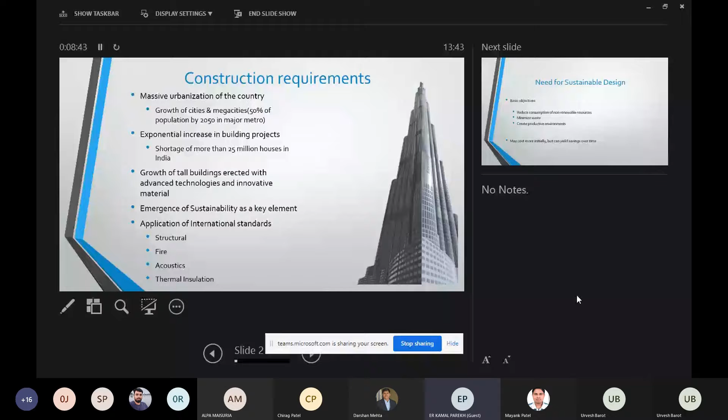It also gives thermal insulation. For areas managed with HVAC air conditioning systems, there is thermal insulation also with these drywalls. It's a sustainable design. It reduces consumption of non-renewable resources, it minimizes waste, and creates a productive environment. Its initial cost is higher, but it can yield savings over time.

There is also an environmental impact that we have studied regarding why we are applying this drywall. The traditional construction system consumes around 70% of fresh water, 25% of wood timber, 33% of CO2 emissions, 30 to 40% of energy used, and above all, 40 to 50% of raw materials is explored. Under these circumstances, we decided to go with these drywall materials.

Now I would like to share some photographs, because we have executed this, so we know how to execute and how to manage it. The real-time photographs are there. For the stem cell building, if I present, sir.

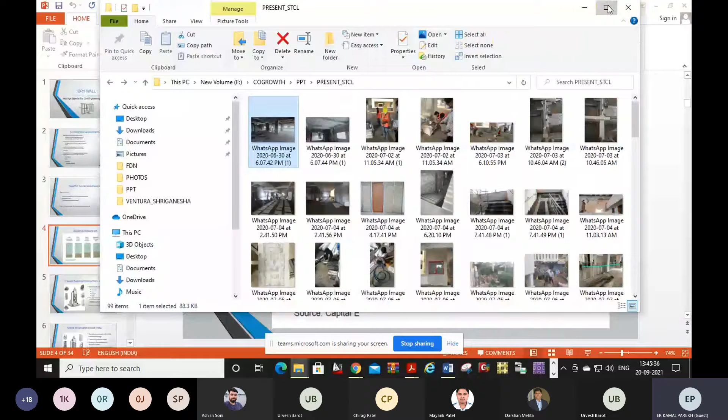Yes, this is the core cell structure I was talking about. It's an RCC column and a beam, with a slab, but we don't have any flooring over there, and we don't have any separation wall over there. These are the periphery walls available to us.

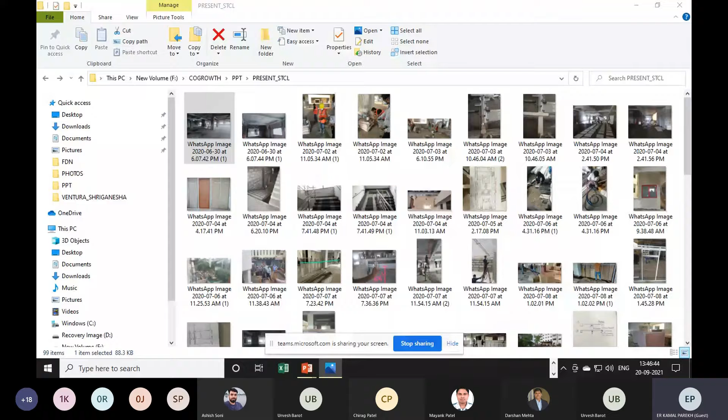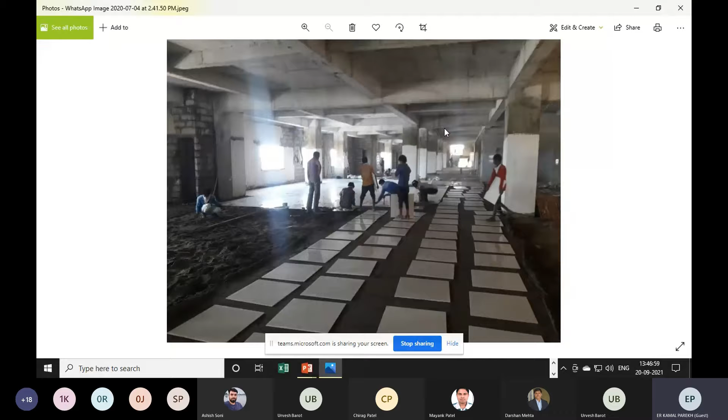So we have used this aerated block also, which is a new age material, because for the toilet blocks and others there are concealed lines. To manage concealing the drainage and plumbing lines, we have used these aerated blocks. These plumbing lines and others are executed during the progress and process of the work. These are the floors on which we have used our traditional vitrified tiles for execution. For the finishes and others, we have used gypsum plasters.

Yes, this is drywall. What we saw there are the vertical members fixed at the bottom on the floor and fixed at the top, with a secondary member, because the size of the sheet available is 8 feet by 4 feet. So to manage the fixity, we require this kind of fixing. We can also fix the door there, and we have fixed it.

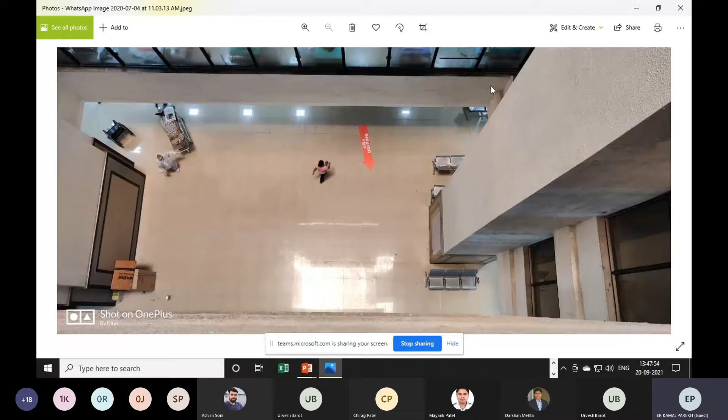After doing all this, we prepared a finished floor for the hospital block. This is the waiting area, a large waiting area of around 15 to 17,000 square feet at the bottom on the ground floor. You see the way and manner in which we have worked. This was the system adopted: one single drawing, one floor having 110 bed capacity on the 7th, 8th, 9th and 10th floors. These plans were prepared, and on each drawing, for each issue and resolution, there is a markup which is signed by all authorities and then executed.

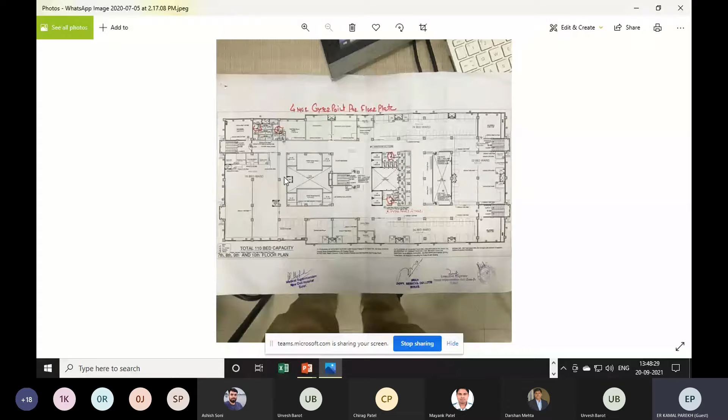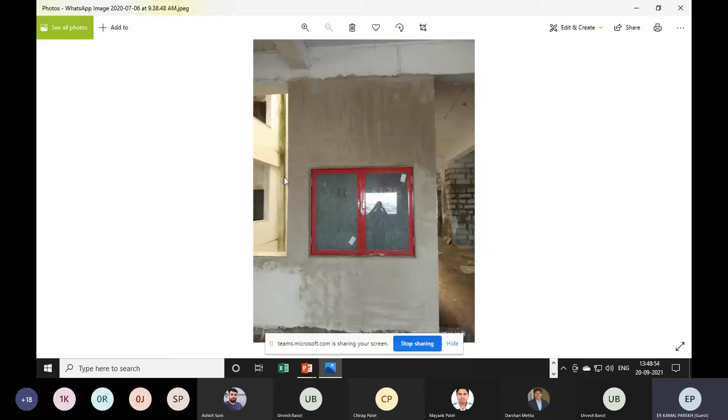For the electricals also, we have managed with GI hot dip galvanized GI sheets and others. For fire protection in hospitals, fire resistance is an issue, and to take care of that, we have a fire duct which is also managed with the drywalls as well as aerated blocks. This is the row side on which we have executed. This is a photograph of one oxygen tank installed there. I'm lucky enough to have 3 oxygen tanks of 13,000 liter capacity for the civil hospital campus, with one campus having 3 tanks together, to take care of COVID patients.

This is the row framing, the row framing of the panels. On this panel, calcium boards are fixed on both sides, and then there are plaster boards which are also fixed. Now the issue that arises for us is how to manage the oxygen lines, the electricals, and the nurse calling system, because if any patient requires help from a medical authority, on-floor doctor, or nurse, they need to call them. So to enable this call, it requires a nursing calling system. All these systems are also managed here within these drywalls.

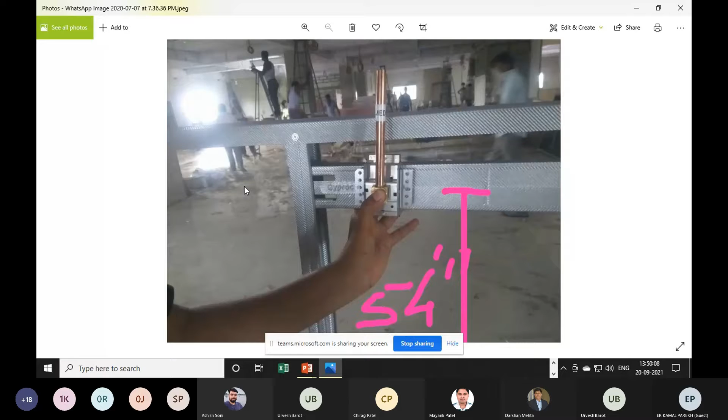Look, these are the medical gas pipelines, because each and every bed requires oxygen, which is high pressurized oxygen supply to each and every individual bed. On each floor, number of activities are going on - the flooring, the plastering, the finishing, the whitewashing, medical gas pipeline laying, electricals, all the things are going simultaneously.

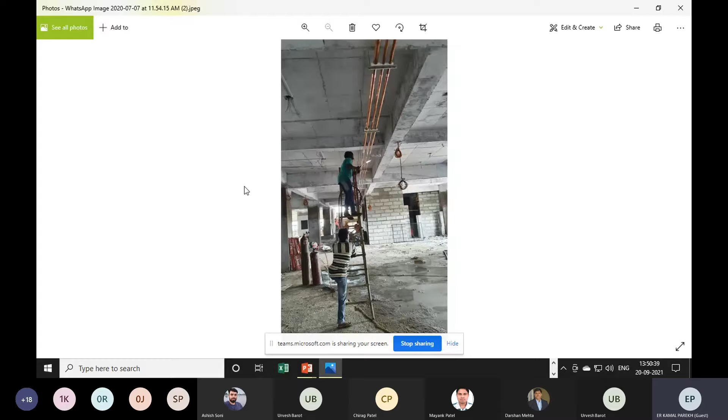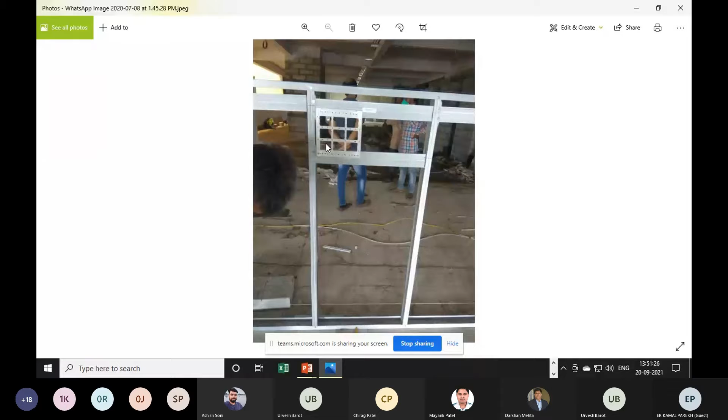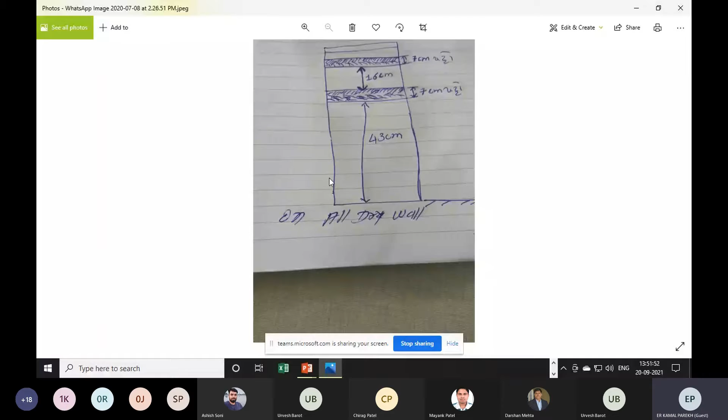Because for the operation of fan, light, tube lights and all other, it requires electrical line out and layout, and all is managed within this. And you see, these are the way how we manage it. On site, this kind of sketches were prepared, released to the executing agency, and they are executing it, and because of that, this 1800 bed facility is available for Surat.

So this is also one photograph, because we have worked. These are the real photographs. Nothing is added over here. Nothing animated over here. These are all the raw photographs taken over there while visiting the site, while walking there, and while supervising it.

And you see, this panel is fixed from ground to the bottom of this beam, so it's a complete cladding over here. So these are the ward, this is the ward area. So with the medical authority, we have observed that we require only 5 feet or 6 feet of height of separation is enough, because then we have visibility. If any doctor or medical authority is passing through, they can have a vision inside the ward also, so he can take care of it, right?

These are the oxygen points, oxygen outlets, fixed with each bed, and they are positioned and fixed with this drywall panels itself over here. So with this drywall, you can manage each and everything we conventionally required with our conventional system of brick masonry or aerated block masonry and all others.

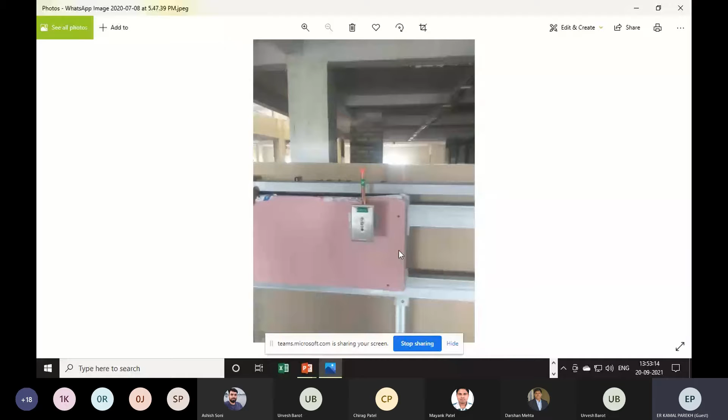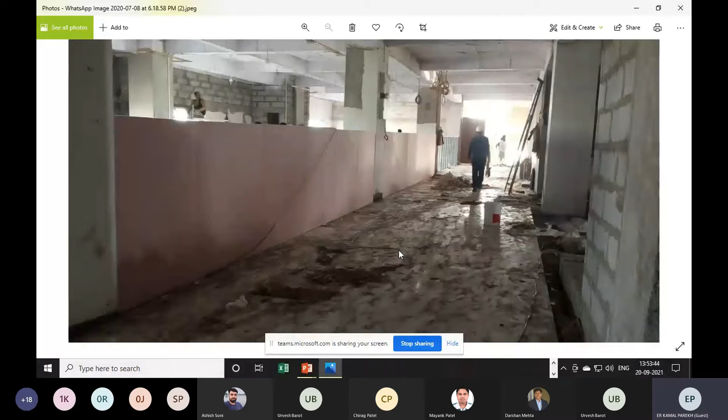So this is another photograph of a complete panel ready, and these are just the rough finishes you are observing. Over it, we have applied simple waterproof putty, and then for the sterilization point of view, sanitization point of view, antibacterial paint, nothing else. And our ward is ready to serve.

You see, if you observe that the length of the span is around 8 meters, and for that 8 meters also, it straight away works. We have checked the lateral stability also, because basically I am a structural designer, so I was worried about the lateral stability. Longitudinal direction it is okay, but what about the other direction? In the lateral direction, we have checked it, and if required, we have suggested some solutions and suggestions like this.

Just as we structural engineers understand what a vertical band is - okay, so these are the vertical elements. If the length is around 8 meters, at center, this 150mm to 200mm width, right? These are the things we have provided, which provided lateral stability. If it's column to column connected, but if it is column to free end, then at the end also we have suggested similar kind of vertical bands which are made of that framing GI element.

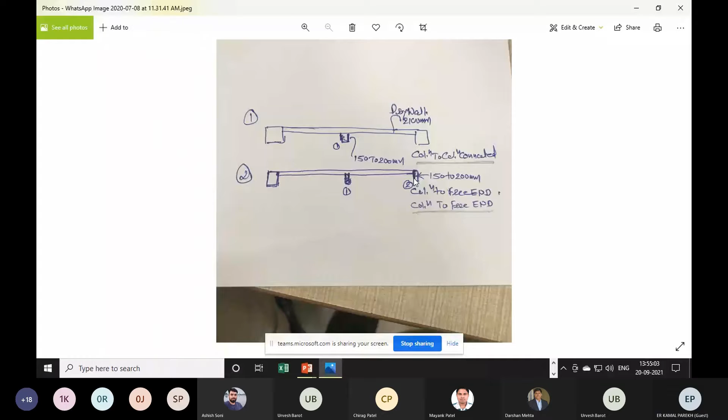Look this, this is free end, this is entrance to the ward. So we have provided over here in both directions, so lateral stability is achieved. Over here with column, it is fixed; on floor, it is fixed with the flooring. And vertical tile members are also there, but this gives the lateral stability to the elements.

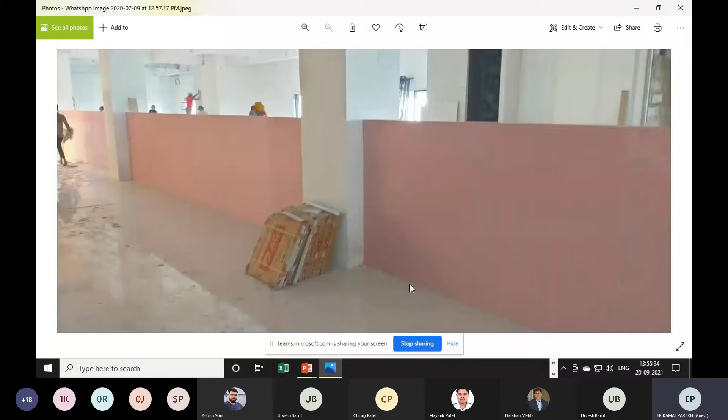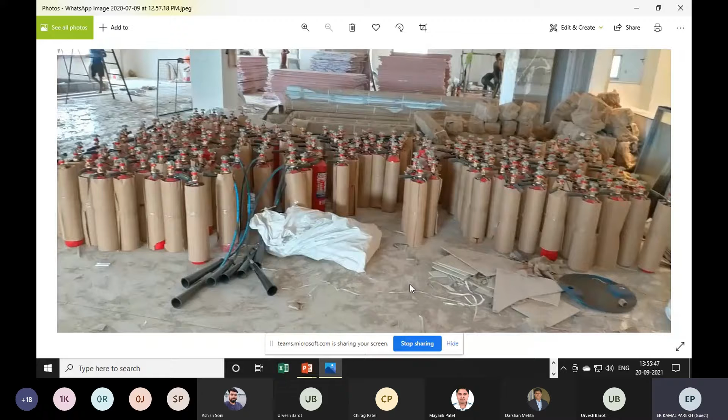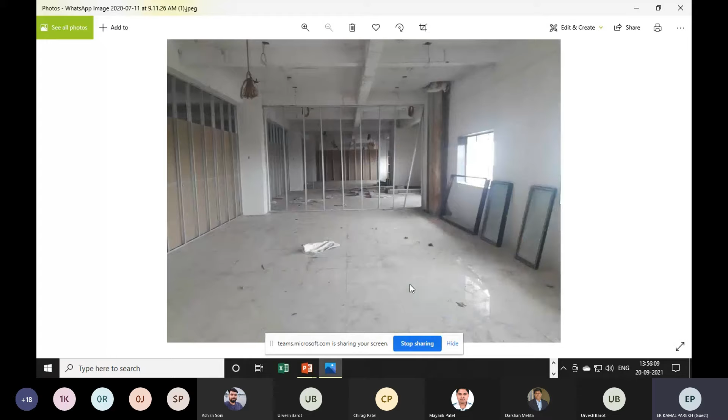These are the finishes we have achieved, and you see, with it, these are the fire hydrant - everything is there on site. I'm telling you, as we are working now, a lot of things are going on together. The fire hydrants are there, and then these furnitures are also fixed over there. This is also oxygen outlet. The furnitures are also laid because we have procured that material, but how to stock it? So we have procured it, we have stocked it on the existing floor itself, where work is going on, and it continues.

This is the stem cell building, which is basement, ground plus 10-story building. And this is also the tower crane we have used, because on terrace, for the fire requirement, we require around 240,000 liters of overhead tank. And to construct with the traditional RCC, it is difficult for us. So we have procured 10,000, 20,000 liters capacity PVC tanks, and we have just put it on the terrace.

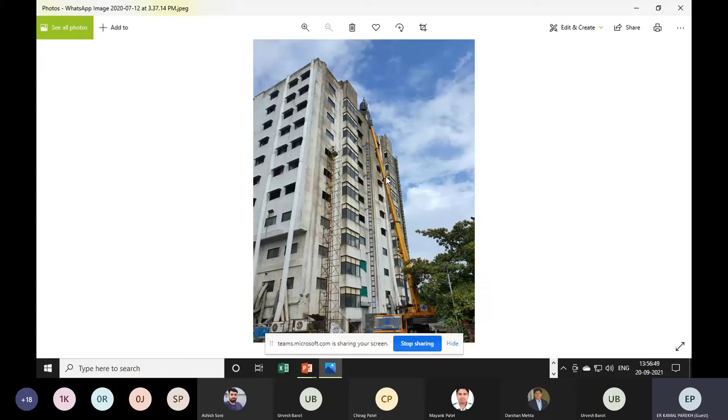This is one of the important and much more integral parts of the medical hospital. This is the manifold, where the oxygen supply is controlled with control valves, floor valves. It is connected with the 30,000 liter tank installed on site.

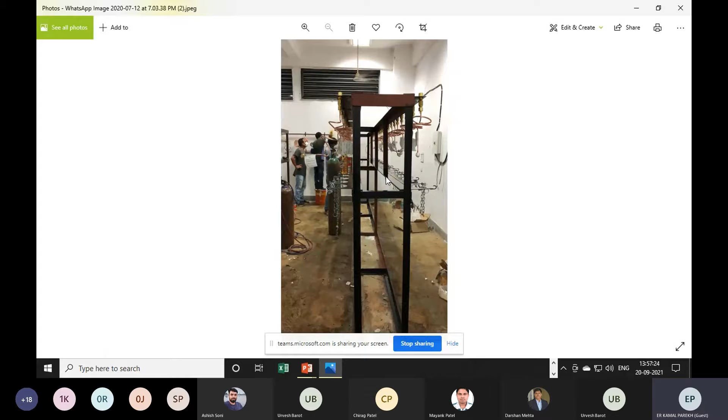For all this, as and when required, we have not managed with aerated walls, but with the dry walls we have executed the work. This way, these oxygen lines are executed on site.

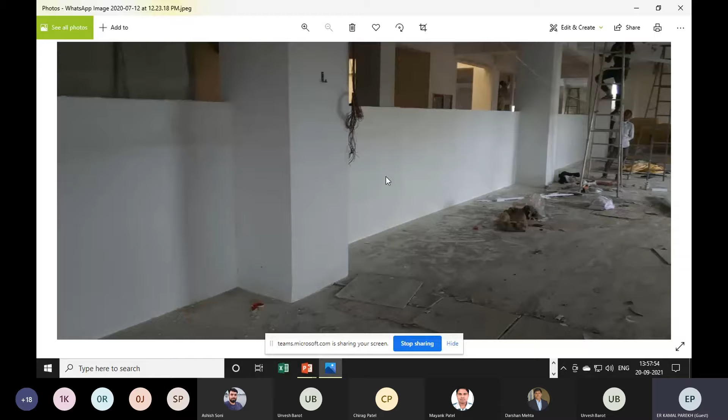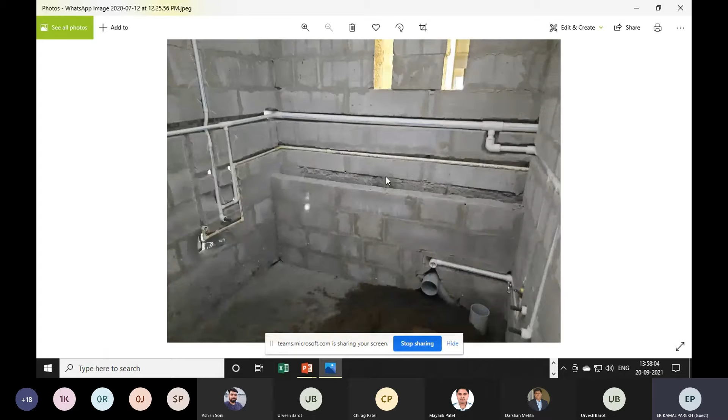This is the final finishes of a ward, with a drywall putty finish, and over it antibacterial paint is applied. These are the plumbing lines managed with aerated blocks. For the electricals, the floor panels are installed. This way, the ward is ready for us to serve.

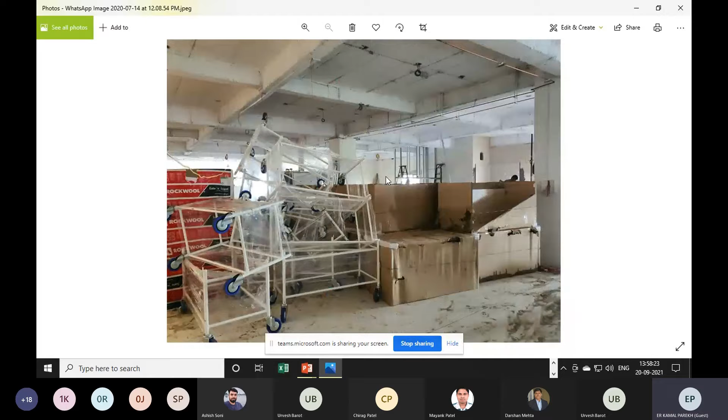Simultaneously, as and when furniture is available to us, we have started dumping it, managing it, and positioning it. This way, the ward is ready to show.

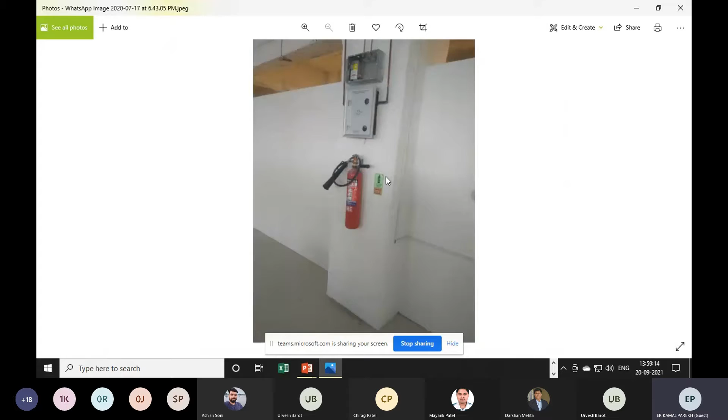For all the floors, we have managed with water coolers, RO plants, because for dialysis we require RO. So RO plants are also installed at each floor.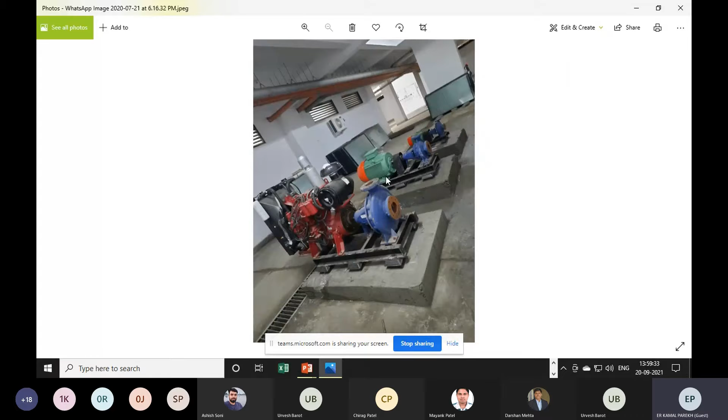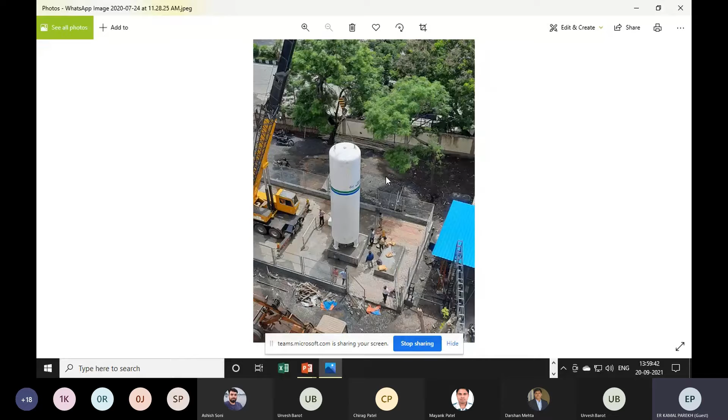This is the photograph of fire pumps installed, and this is the tank which is positioned, connected with the hospital, which has served it.

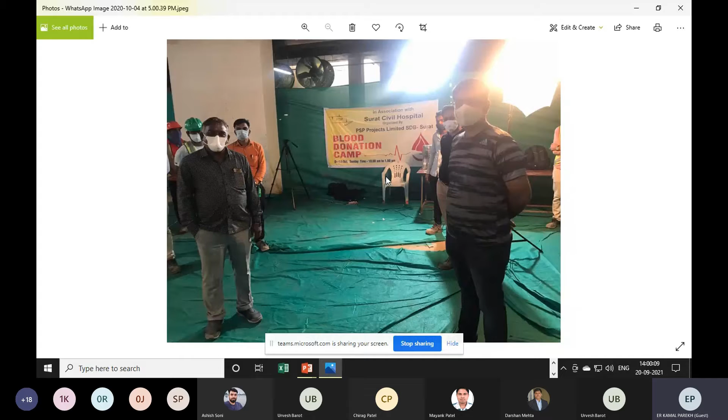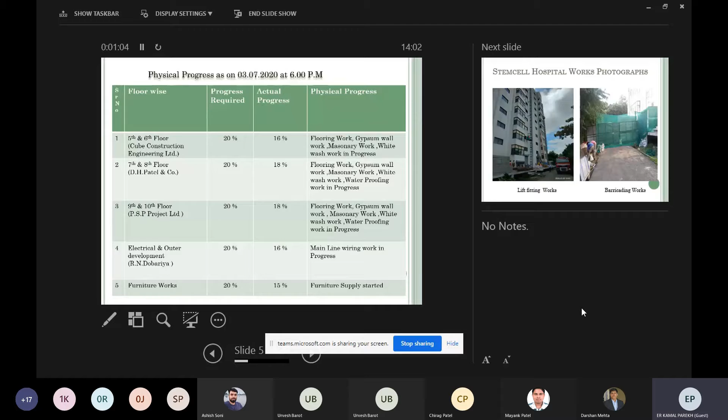It's a mandatory requirement because that condition got worsened in the months of April, May, June, July. So during this session, we started this kidney hospital. We have actually managed with agencies, those who are government agencies, and all these R&B contractors who are of class A category, were there with us and they have worked with us.

I think this is stem cell.

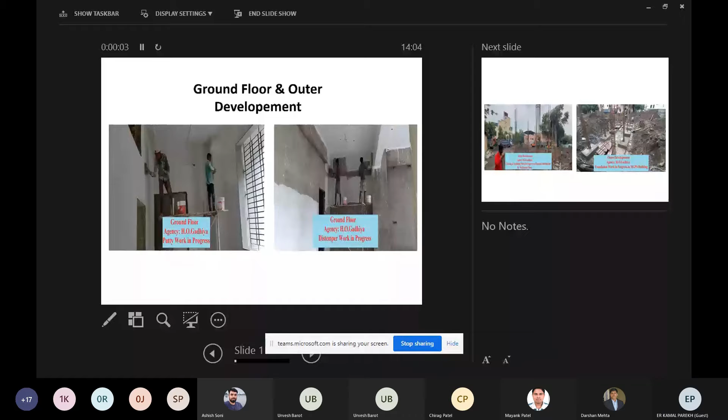So this is another building we have, having a kidney building, the similar condition we have over there. You see the construction of the medical room to the substation to the transformer yard, with an underground tank of around 7.5 lakh capacity. Nothing is over there, no overhead tank over there.

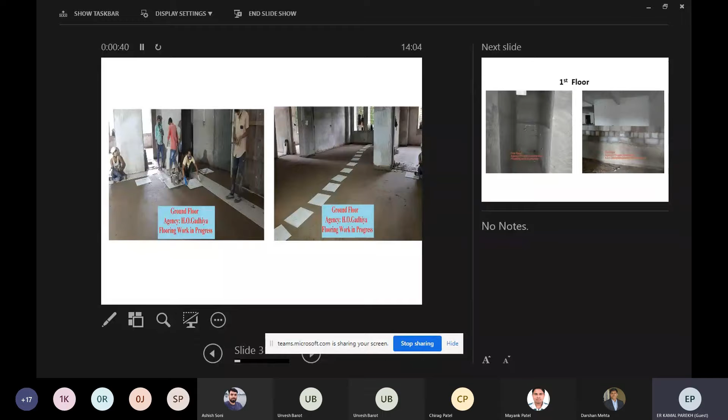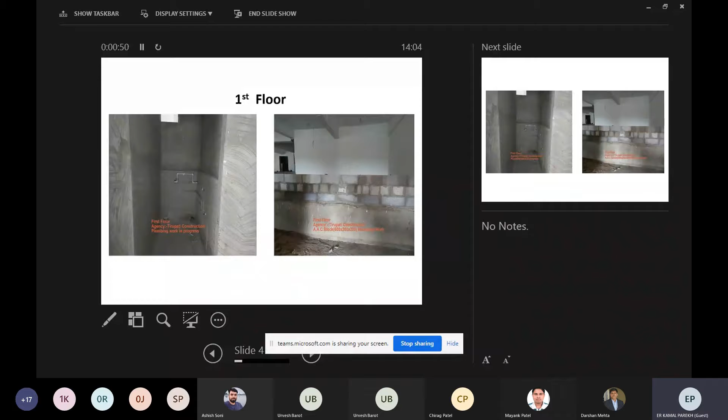In the similar way, what we experienced with the stem cell, we have executed this building also with dry walls. So during those 2.5 months of period, we have a 1800 bed facility, and because of this dry wall, it was possible.

These are some raw photographs. Actually, these presentations were prepared at that time when we were submitting our submission to the government authorities regarding the progress of the work and all other. So during those days, these things were prepared, so these are all the original photographs.

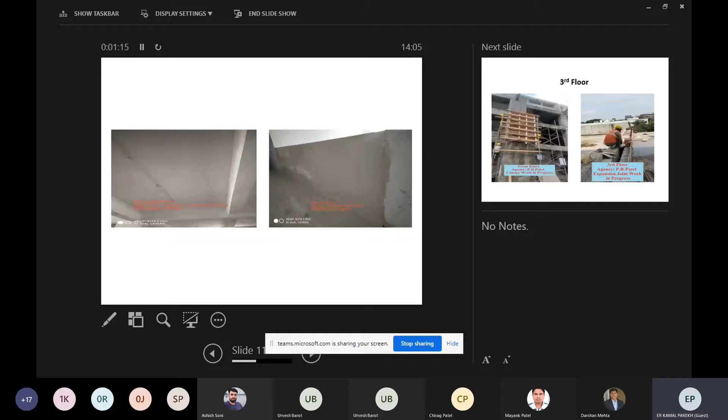The unfinished RCC work is also there, the unfinished expansion joint work is also there, and everything gets managed and executed.

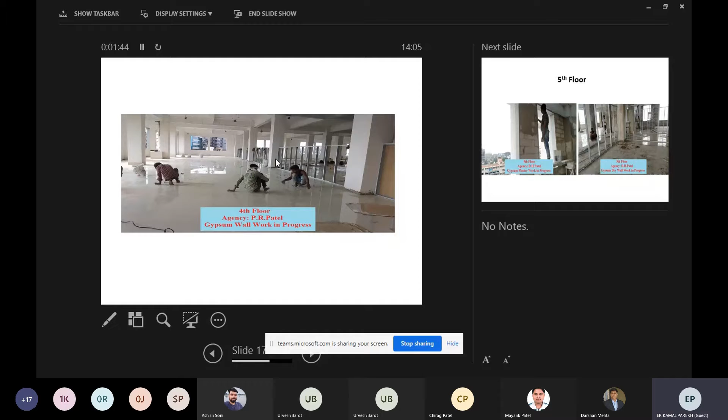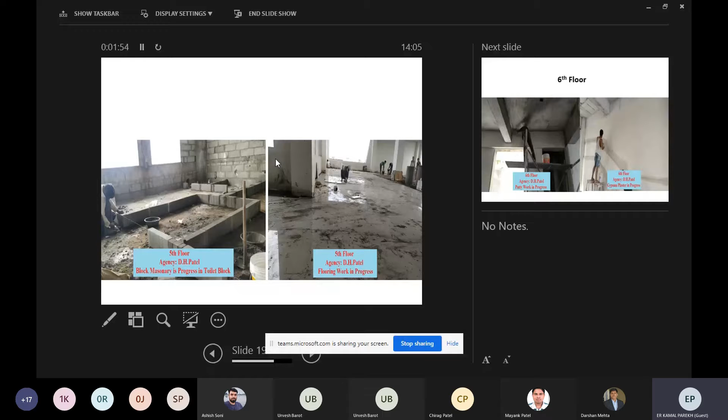Yes, here again, these dry walls were executed and constructed on site, on different floors, because this building has 8 floors, ground plus 8, and all require all facilities. So everything is managed with these dry walls.

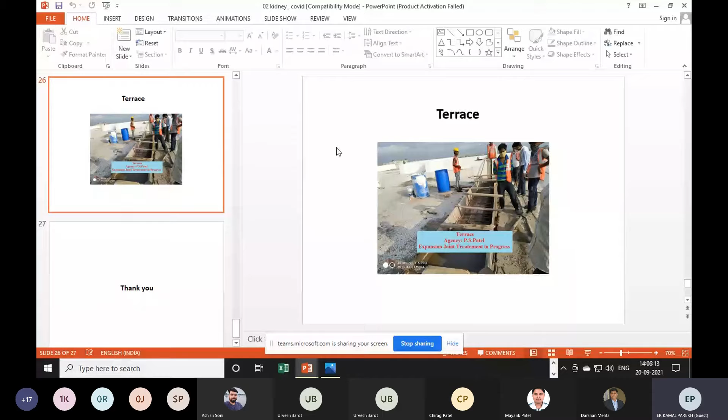So again we go to this original one.

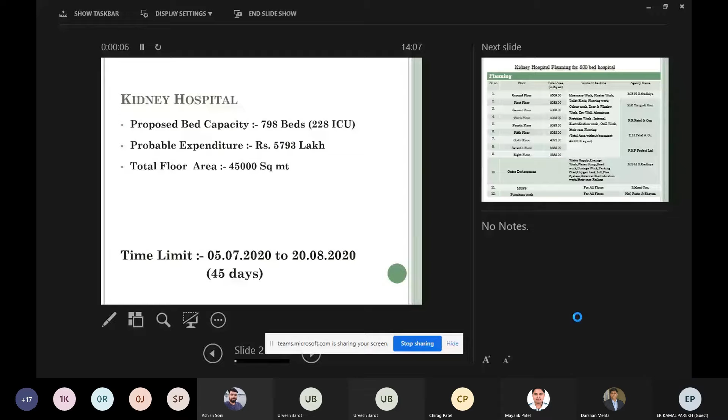So this way, in 45 days, this kidney building was constructed. The work was also monitored with simple Excel sheets for day by day progress, and the remaining work for a day or for the upcoming days was planned on site itself, because we don't have any specific tool available to us. And you see, this is the building which is handed over by government of Gujarat for executive work.

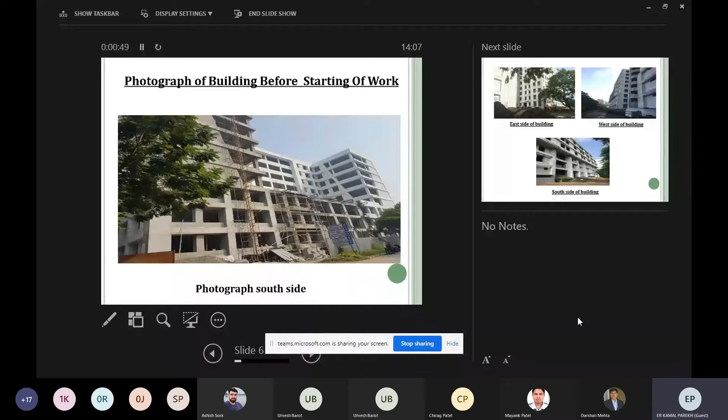With 5% or 10% more money added, we can use this building for any kind of healthcare facility, because the infrastructure related to electrical, plumbing, water supply, and all other aspects is designed in such a way that if it becomes a full-fledged government hospital, that infrastructure should be sufficient enough. It is planned and managed so that this exercise does not go to waste.

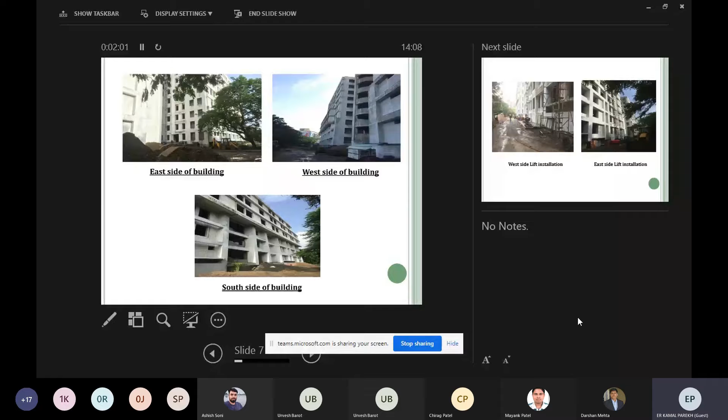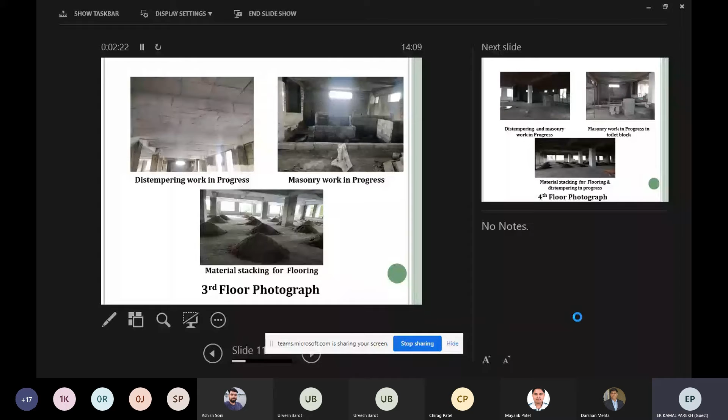So the west side lift installation, the east side lift installation - these are some of the photographs of the first floor. Distempering work is going on, flooring work is in progress. This is for the second floor, this is the third floor, this is for the fourth floor, fifth floor, sixth floor, and many more.

That underground sump was really a challenge for us, because for the underground sump, we need to use traditional RCC only, since it's a permanent structure. So a 7,50,000 liter capacity underground tank was planned, designed and executed, with around 2.5 lakh liter capacity for fire and 5 lakh liter capacity for the domestic supply for the hospital.

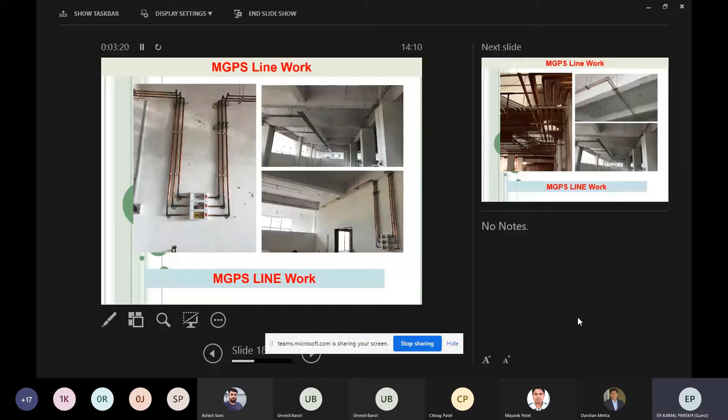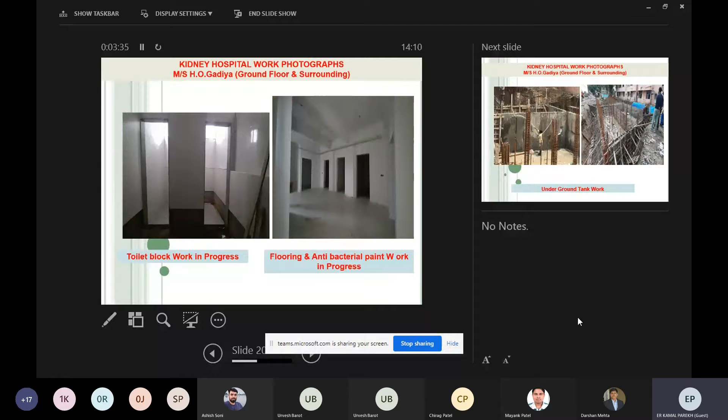In this kidney hospital, the medical gas lines were also installed at each and every floor. These are some photographs of the actual execution there. The toilet blocks were not available, the flooring was not there, antibacterial paints were applied over it. And this is the photograph of the underground UG tank, which was executed.

You see, because of monsoon and other factors, there were a lot of hindrances also. We don't have even a medical gas pipeline supply control room, which we call MGPS building - that was also constructed on the rear side. One can move through that ring road and see all these structures standing there, and they are all functional now. On the periphery, there is no service road available, so concrete roads were also executed on site.

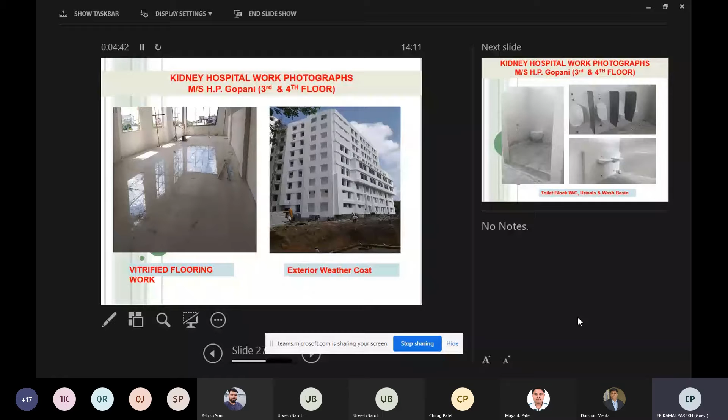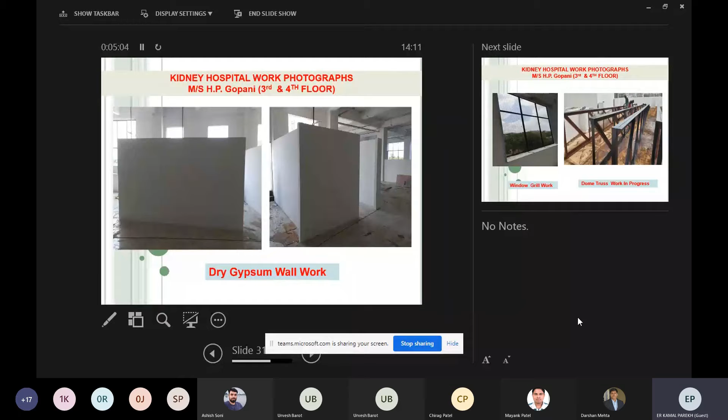Some exterior weather coat was applied on the front part. On the left hand side, that is toward the Gandhi Engineering College side, you can see the view. This is the front elevation work. These are the dry gypsum wall work. The building required covering a specific open-to-sky area, so the dome was covered with a truss.

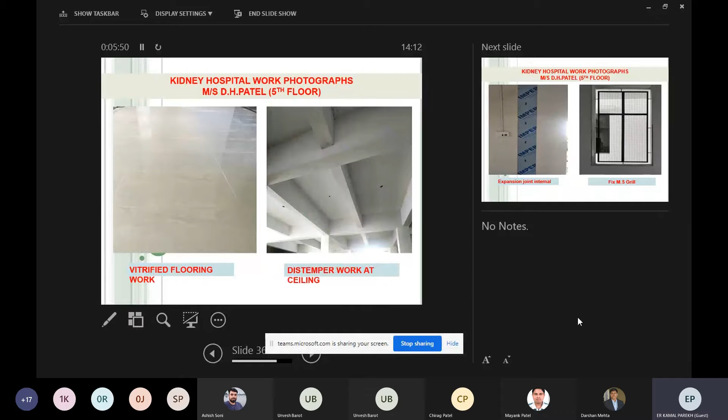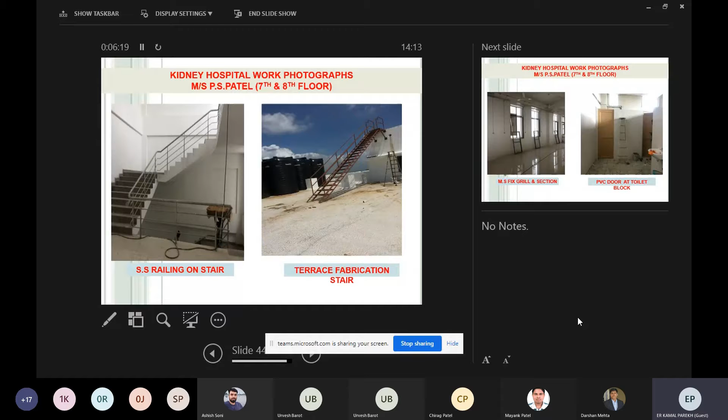So these are all photographs of ongoing works there at that time, one and a half years back. These are the overhead tanks, PVC overhead tanks of 20,000 liter capacity each, installed there. And after completion, this was the image of the building which we were trying to achieve.

Now we have already discussed the traditional materials: concrete, sand, cement, brick, aerated block, cement concrete blocks, which are available but have very high embodied energy in current construction material. The construction process is very slow, wastes lots of water, is messy, and building codes need to evolve each and every time. So we have decided to go with drywall.

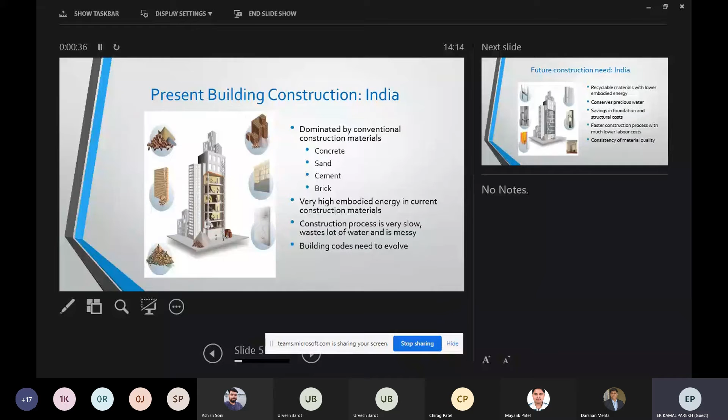Now, with this drywall, it fulfills future construction needs - recyclable material with lower embodied energy. Look, if we dismantle or demolish any RCC or brick masonry, what do we have? Just the scrap value, nothing else.

Whereas this drywall material we have used, we can reuse it also by separating out all the fixings, studs and other components. It conserves precious water, and provides savings in foundation and structural cost because it's a lightweight material. In comparison to brick masonry, the density of aerated block is roughly one-third. The density of this aerated block drywall material is around 150 kg per cubic meter. So it's a lightweight material, allowing faster construction process with much lower labor cost.

And consistency of material quality is also available because these are factory-made, tailor-made materials available for execution. So we can execute it with good workmanship, even with unskilled laborers.

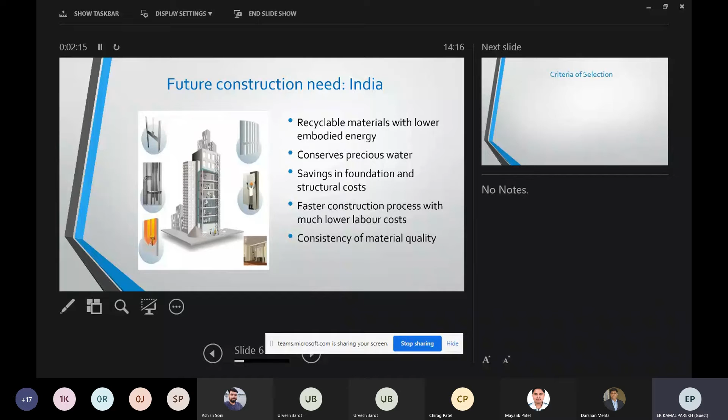For the selection criteria, these are certain criteria we have observed: it gives acoustic privacy, passive fire resistance, life safety. I myself have checked it with a fire gun which we are using for welding copper pipes, and we are happy with its fire resistant capacity. What we found is it has strength, and structurally it is moldable to some extent. So we are in a position to manage our wards, doctor's rooms, change rooms, nurses' rooms, medical and paramedical staff's restroom areas, everything, even for wet areas.

And it is a flexible material, and it gives me a high quality of interior finishes. It also allows me to manage all my service lines within that panel.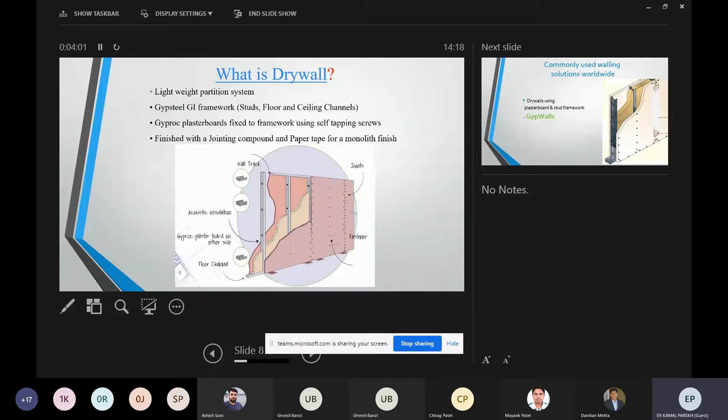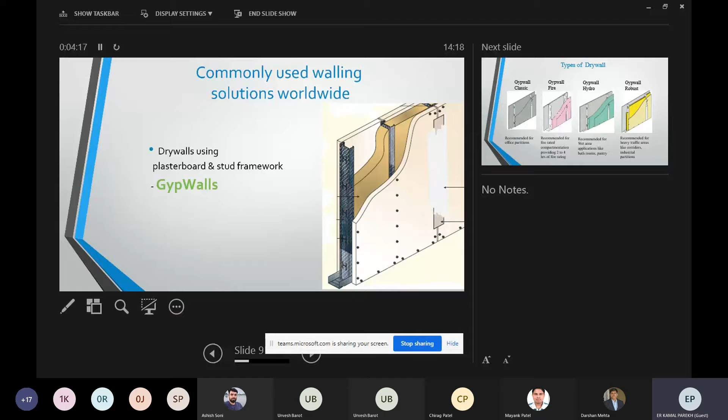Nowadays it's a commonly used walling solution worldwide. Drywall using plasterboard and stud framework.

These are the market names: Gypwall Classic, Gypwall Fire, Gypwall Hydro, Gypwall Robust. Gypwall Classic is recommended for office partitions. Gypwall Fire has 2 to 4 hours of fire rating and is recommended for fire-rated compartments. Gypwall Hydro is recommended for wet area applications like bathrooms and pantries. Gypwall Robust is recommended for heavy traffic areas like corridors and industrial partitions.

These are certain benefits of drywall: 8 to 10 times lighter than the masonry system, as I told you earlier, and speed of installation is 3 to 4 times faster than masonry.

It has aesthetic appeal, gives excellent performance, which I have studied, observed, and executed. It's a clean and dust-free work environment, a dry construction where water is not used or utilized anywhere. It has flexibility in creating and dividing spaces according to our need.

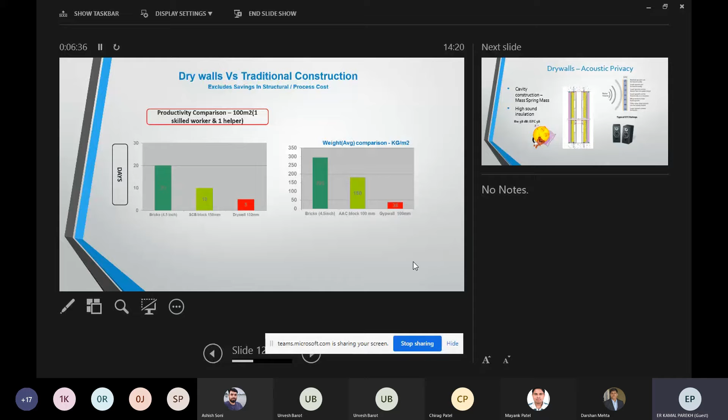And these are some comparisons: drywall versus traditional construction. Weight average comparison is there. Also days with one skilled worker and one helper, how we can see the comparative of it. And it has an acoustic facility which gives acoustic privacy, cavity construction, mass-spring-mass, high sound insulation.

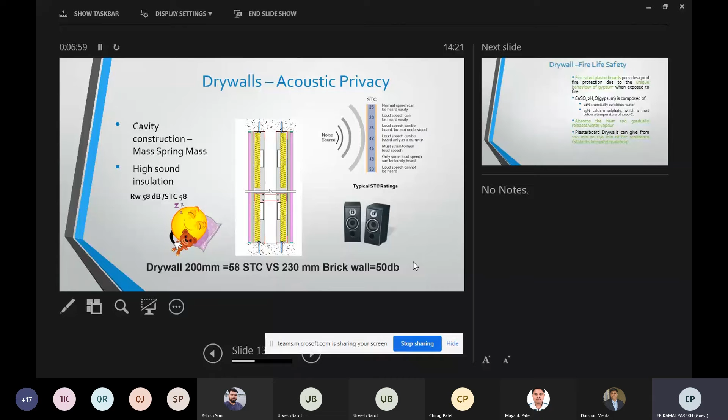So considering all those aspects, during those 45 days we are in a position to deliver an 1800 bed facility to Surat.

Fire-rated plasterboard provides good fire protection due to the unique behavior of gypsum when exposed to fire. Gypsum is composed of 21% chemically combined water and 79% calcium sulfate, which is inert below a temperature of 1200 degrees centigrade, which normally does not happen. Only in the case of fire does it.

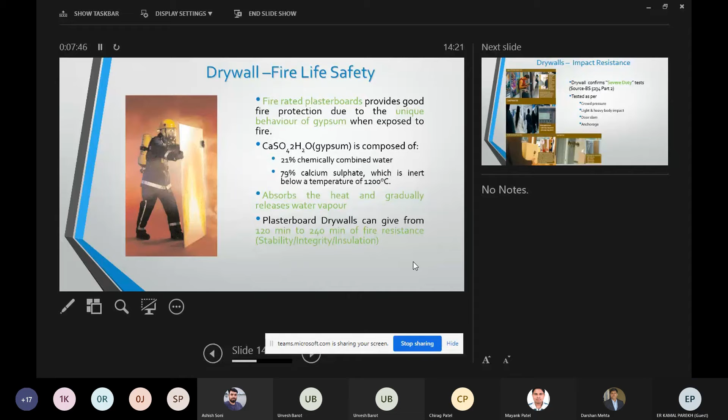It absorbs the heat and gradually releases water vapor. Plasterboard drywalls can give from 120 to 240 minutes of fire resistance, which is a mandatory requirement as per the code provisions for hospital buildings. And that's why we have selected this drywall material.

It is tested in the laboratory with all scientific data and analysis: crowd pressure, light and heavy body impact, door slam, anchorage. It is a tested material.

The only thing is these drywalls are non-load bearing because it's a lightweight material, so you cannot transfer load with this walling system. It can be constructed for design height up to 13 meters and beyond with this vertical framing. You can design it, plan it, and execute it.

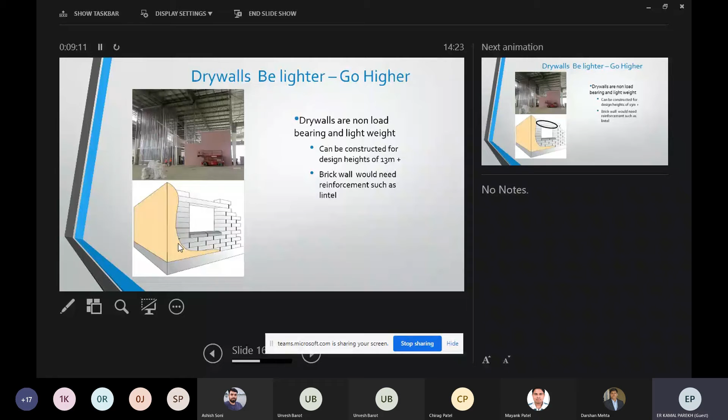Whereas for brick walls, we require horizontal bands, vertical bands and all other considerations straight away. So overall, considering the time frame available to us, drywall is the only solution which we have executed in wet areas.

You see, look, this flush tank for the toilet is also managed over here. This vanity can be prepared, this WC water closet can be installed. And for the finishes, tiles or marble, yes, you can fix it with it.

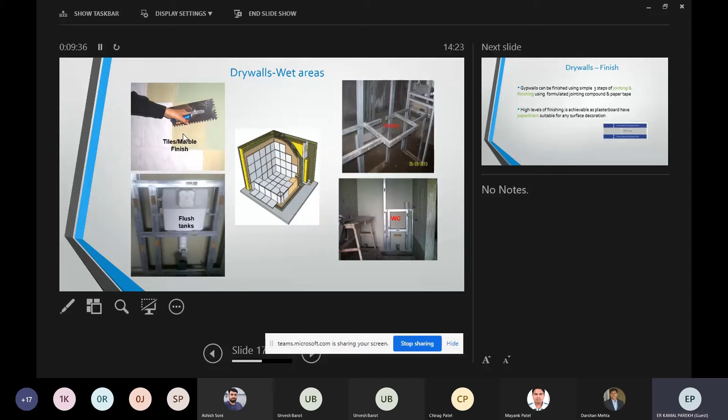For the finishes, this gyp wall can be finished using simple 3 steps of jointing and finishing using formulated jointing compound and paper tape. High level of finishing is achievable as plasterboards have paper linings suitable for any surface decoration.

Paint, stone, marble, tiles, wallpaper, paneling, anything we can apply over it, and we have a desired finish as per our architectural and aesthetic demands.

As we discussed earlier, it's a green material. It ensures that the system used in construction contributes towards energy and atmosphere. Products used have low embodied energy, and the system provides high thermal insulation. For material and resources, it has recycled content and can be recycled. It uses regional materials and gives a healthy and productive environment, as it provides a dust-free environment.

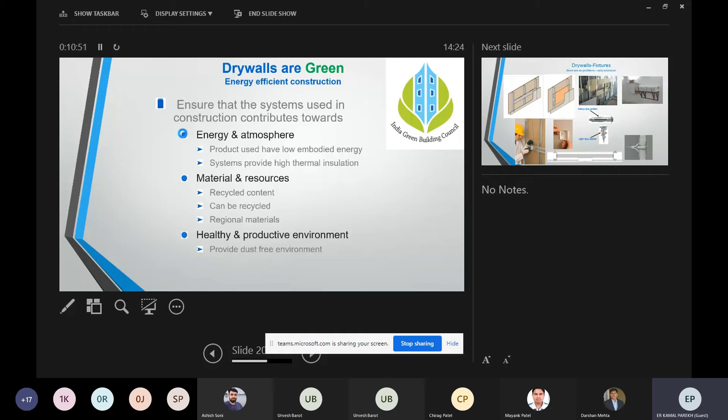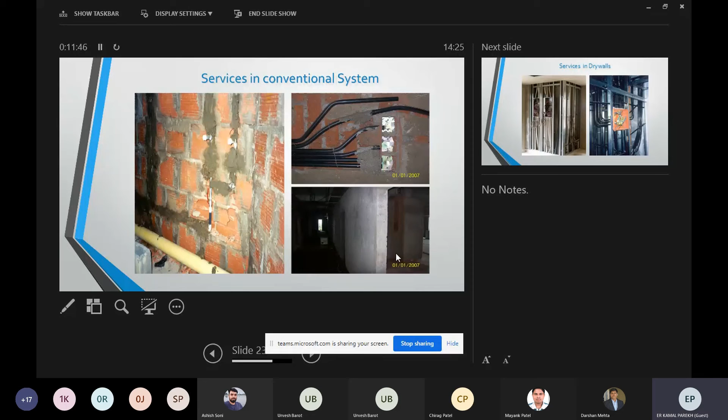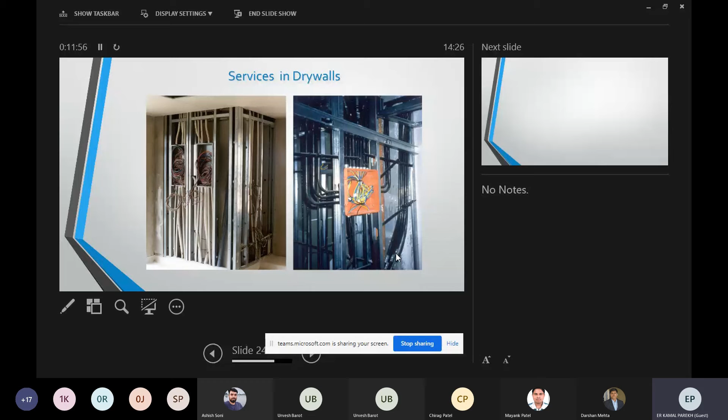So this is drywall boarding finishing. We have seen with this building also, the services in the conventional system - the same thing is managed over here with this drywall. We have seen our electrical installations, the ELV system, medical gas pipelines, and all others are managed within that wall itself.

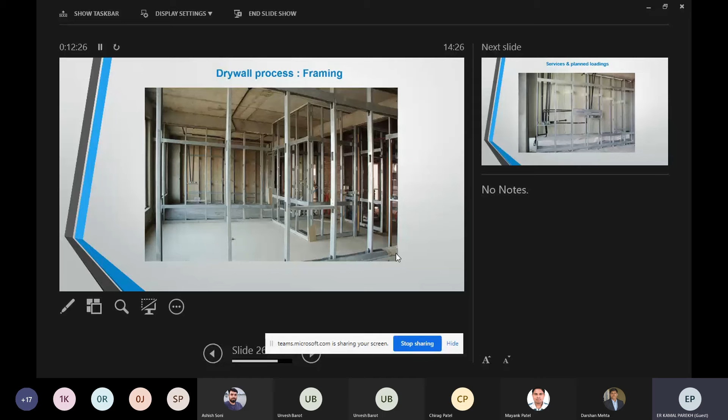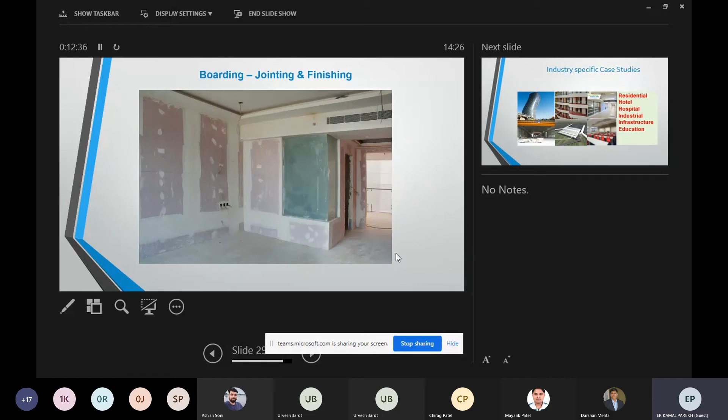So if we compare the conventional construction with the modern construction system, this gyp wall gives better results, and it's a faster construction. This is the framing shown with the photographs also in actual execution. These are the service lines, these are the insulations, and this is the board jointing and their finishings.

It can be used for residential, hotels, hospitals, industrial, infrastructure, educational, so institution buildings also we can use it. Yes, you have already seen all these photographs that we have executed it with our kidney as well as stem cell building, so as to generate COVID facilities.